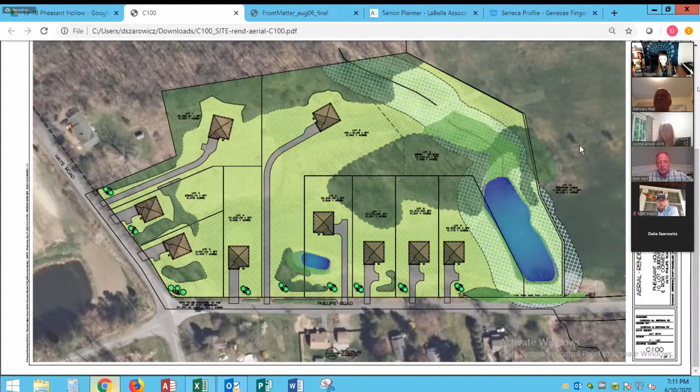So in essence, the map you have in front of you is the same map we've been working on for the last 7 or 8 months. We first introduced the project back about a year ago, in June of last year. We've had some slight revisions, but for the most part, the lot configuration and layout you see here is similar to what we've had all along. This is the Pheasant Hollow Golf Course parcel of land, 106 acres in size. The area shown in the more vibrant green shade, where all the lots are, is slightly over 10 acres in size. The 10 acres is a requirement of the residential cluster provision.

So in essence, the intent is to utilize existing road frontage on Hays Road and on Phillips Road. We've broken that land up into 9 acres, 9 lots, and the 10th lot is the remaining golf course parcel. The lots are all about a half acre in size up to about an acre. Lot number 1 is an acre in size, and lot number 5, actually the lot that I'm building on, is about 4 acres in total, but 2 acres of that is green space or open space area per the cluster provision. That would be the area, if you see the dashed line running about the midpoint through lot number 5, and all that shaded area and the irrigation pond on the right-hand side.

So the overall acreage of lot number 5 is about 4 acres in size, but 2 acres is open space for all the lot owners, the other 8 lot owners within the subdivision. This parcel of land has existing water line with plenty of volume and pressure. We did hydrant flow tests on that.

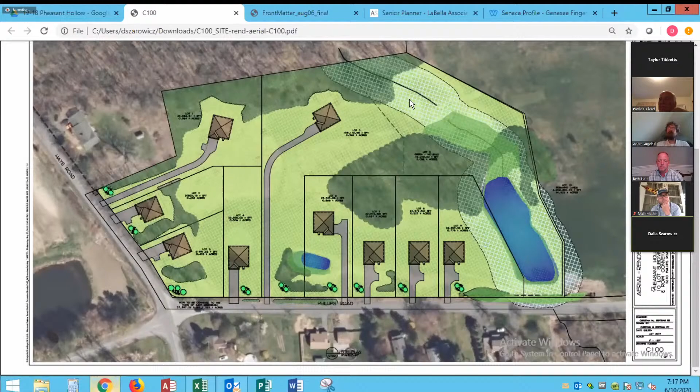Can you hear me all right? Yep, we got you. So now we're going to open up to the public. Adam, I don't know how we do that, or is Dahlia managing that? Yeah, so, we done with the screen sharing? Yeah, I think so. I think we'll open it up to public comment at this point. Okay.

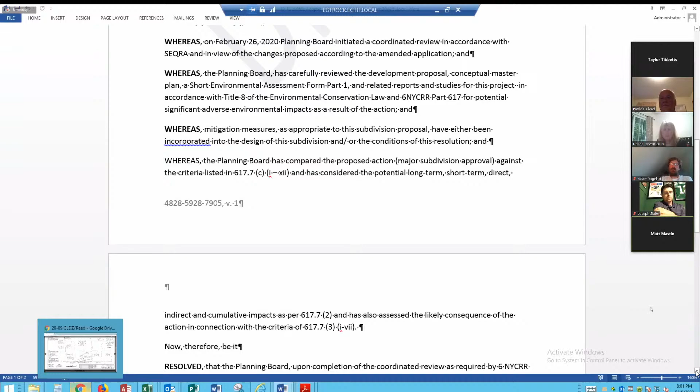and has considered its potential long-term, short-term, direct, indirect, and cumulative impacts as per 617.7(2), and has assessed the likely consequence of the action in connection with the criteria of 617.7(3). Now, therefore, be it resolved

that the planning board, upon completion of the coordinated review as required by 6 NYCRR Part 617, hereby declares itself lead agency under SEQR and reaffirms the classification of the action as an unlisted action in accordance with 6 NYCRR Part 617, and be it further resolved that based on the environmental assessment and review, the planning board has determined

that the project will not have any significant adverse impacts on the environment, and that a negative declaration pursuant to Part 3 of the SEAF is hereby adopted, and be it further resolved that the planning board authorizes the chair to endorse the SEQR determination and the supporting rationale contained therein.

Do I have a second? Second. Second by Mr. Viola. Okay, Ralph Viola. Roll call as follows: Chairman Mastin, yes. Mr. Viola, yes. Ms. Kupiak, Ms. Horn, yes. Mr. Panton, Mr. Panton, Don, you're on mute. Yes. There you go. Motion carried by 5-0 vote.

All right, so next we move on to 1927, the new Verizon store, proposed Verizon store at the Pizza Hut site. So I think we have Luke and we have Guy, right?

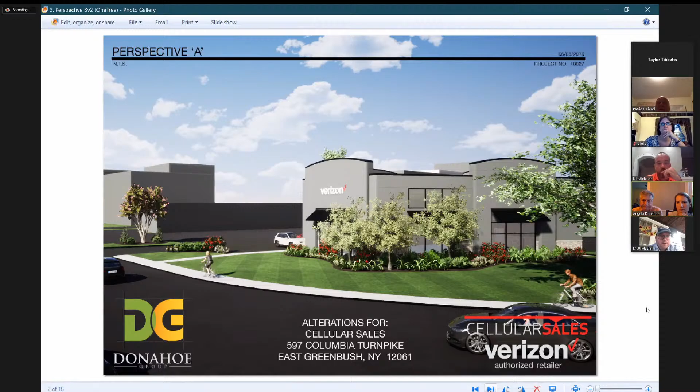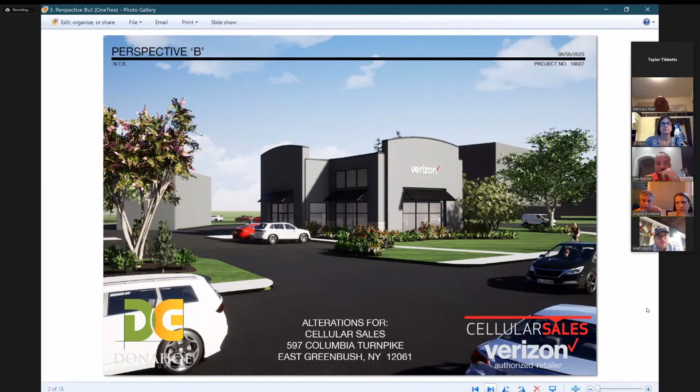So this would be a view. Bear with me, I had gotten my orientation wrong. So this is a view looking east, and again shows the one tree, and shows some planting, some green underneath of it. And you have the site plan document that our engineer had provided as well.

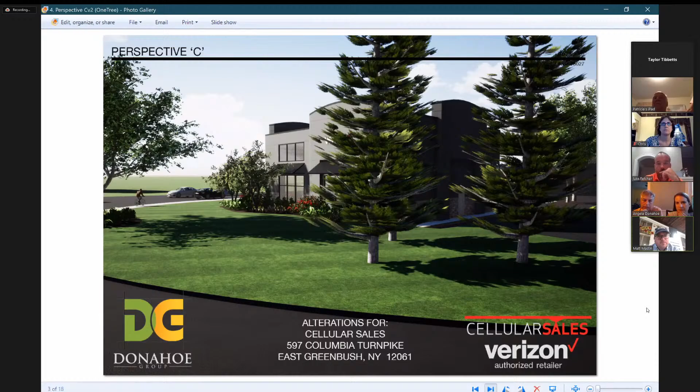Please let me know if you want to stop at any one of these. So you're still proposing the one tree, but you've added the undergrowth and uplighting that Nancy had recommended. Correct.

The other thing we wanted to provide an illustration for the board is that relative to the zoning, should the adjacent lots north on Troy Road or west on Columbia be developed, the zoning requires that any new building be 2 stories or no more than 50 feet in height, and that the building be built up to the property line.

So what I asked Angela to do was create a couple images for the board, so they could see that if the property to the north on Troy or west on Columbia was in fact developed, how that would impact the view. That's something we have no control over, and it is something zoning desires, to try to create that walkable street front.

It's really nice, I hope they go for it. Don, can you go on mute? I have to skip through all of them to get through that.

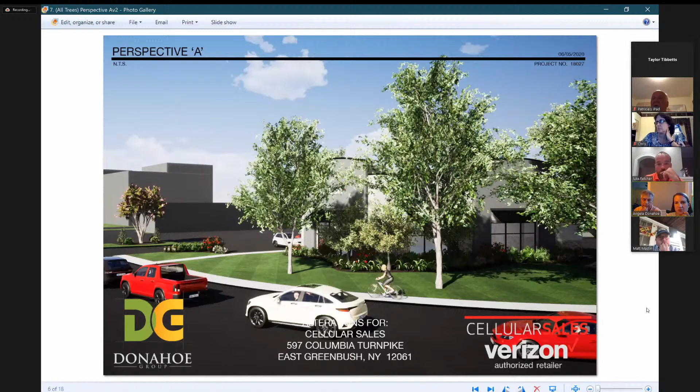Go ahead. Okay, so this is just showing with all the trees. I'm just going to skip through these. And then we'll come back. But I just want to show what Guy was referring to. He got ahead of himself.

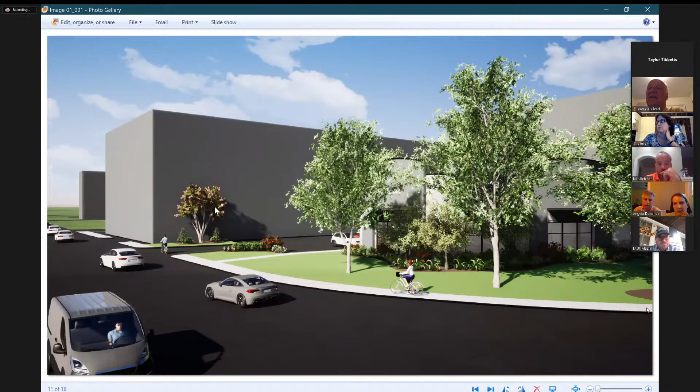So this is showing this building back here represents if a building was built up at the property line. It actually kind of varies a little bit on that side, but on the front, and you can kind of see the one in the back here in this image.

I'd also like to point out that, given we're taking advantage of this existing building, which allows us to set back from the property line, when these other properties are developed to the desired zoning code of being at 0 on the front, we would be the only property that can offer the greenscape we're providing at this point.

That's a fair point. I was wondering why the hell that building is so big.

Yeah, so those are represented at 50 feet, which is the maximum. The height isn't so much the issue, of course, as it is the fact of being up to the 0 property line.

So that is the view traveling south on Troy, because I know there's been a comment about the ability to have a good view of this building traveling south on Troy. But south on Troy, what we're really looking at is a side yard to the property, which doesn't allow us to put signage on, and should the sub shop really have fantastic growth, this is what they may do with their building.

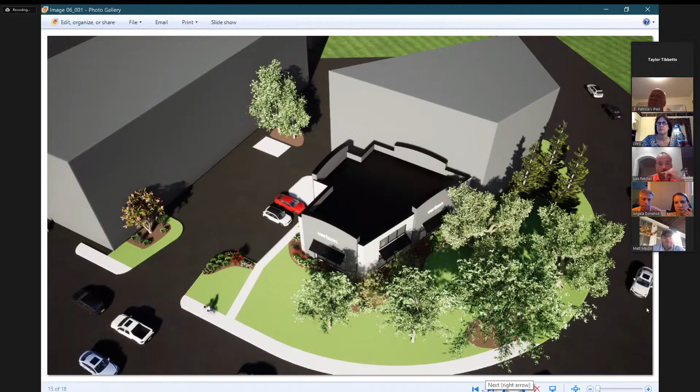We just wanted to kind of propose some still images first. Yeah, no, this was all helpful. I think seeing what the surrounding buildings would be is helpful. So let's get comment and then we can go from there.

So let's start with Ralph. What do you got? Well, the first comment is in regards to the sub shop and, let's say, the laundromat. They also have the same ability to build on the same footprint that you did, that would allow them to keep the building in the same location and also keep the heights down, same as you did. But...

Besides that, as members of the planning board, we're responsible for providing potential developers guidance during the planning process. We must ensure that they are adhering to local laws, zoning requirements, and restrictions. We also have an obligation to the residents of the town to ensure that the beauty and the rural character of our community is protected during the process.

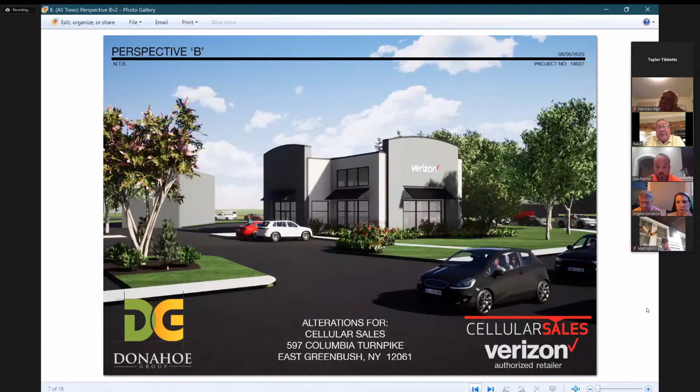This parcel is at the focal hub of our town. It is imperative that we protect whatever green space is left at this intersection. The residents of East Greenbush will be devastated if they were to drive by some morning to find these trees removed. As stated over and over again, these trees in question are not even on the developer's property.

As a member of the East Greenbush Comprehensive Planning Steering Committee, we have discussed this area in detail. Although we all want the development of this commercial area to flourish, we are very well aware of what the rural character of East Greenbush has to offer. We have recommended to the town board that this vision remains.

I believe that the Verizon store can be a viable business in our community, and its success doesn't hinge on whether the store has 360-degree visibility at all times. Given the reasons I've stated over the last month, I urge my fellow board members to realize the devastating visual impact we will have on a major focal hub in our town if we allow the trees to be removed. I cannot support this project as currently proposed, and I hope my fellow members will consider these points in making their decision.

Thank you. Thanks, Ralph. Nancy?

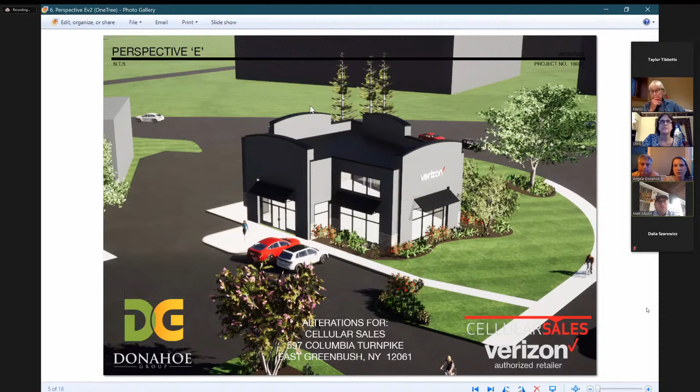See if I can, I'm just going to do start screen share, see if that does it. Can you guys see my screen? Not yet. Not yet.

Come on. There you go. Now we can. Yeah, okay, all right.

So this is the tree that I'm talking about, that I do think covers quite a bit of the side. Can you start your PowerPoint so it is expanded? Oh, sure.

You can go down on your right, next to the minus. There we go. On the slide view. Can you see it still?

Yes, so that's the tree that I'm talking about. If that were down, you could see this side of the building all the way to the back corner right here. You're looking at it at an angle, but as you're driving along, this is the tree that's in the way.

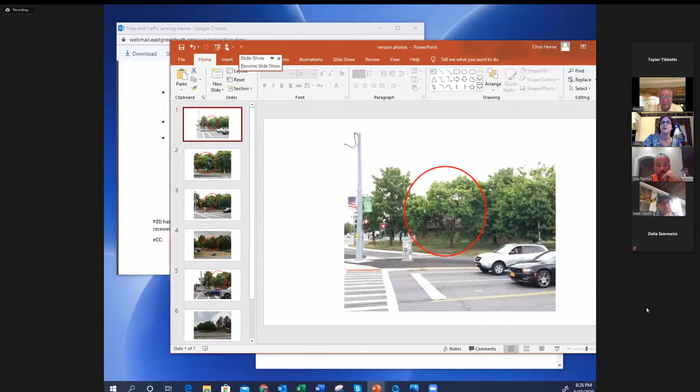And these low branches here, which are on this tree, could easily be trimmed away. And if you take this tree out, you've got full view of the entire side of this building.

Chris, did you take this picture? I did, yep. Where did you take this picture from? I was standing in the middle median, but at the very corner, like almost in the road.

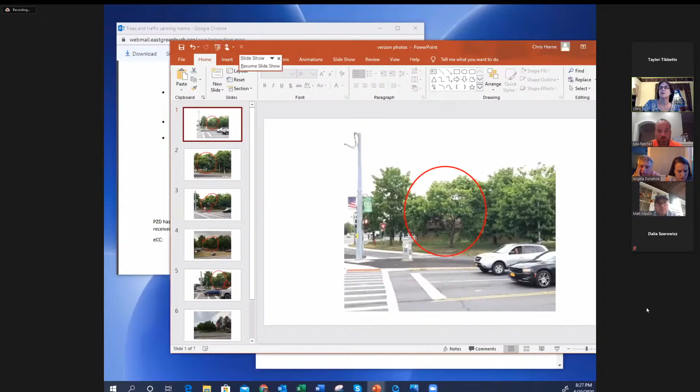Thank you. Let me see if I can... so that's... oops. Not able to advance the slides for some reason.

So I guess what I'm thinking is, is there some kind of happy medium we can get to here where we can put this to bed? Are you guys, meaning Guy and Luke, willing to keep 3 trees? I know it's going to pain you to do so, but not take them all out, and we can meet you somewhere in the middle.

And I'm actually a little curious, which is the tree that you're proposing to keep? Well, with your picture there, the tree that we're proposing to keep is the one most left in that view. It's the tree right on the point, probably a significant tree relative to the point.

And of course, you're demonstrating that removing this tree helps us with some visibility to the corner. Yeah.

Is my screen still showing the tree? No, it isn't. The PowerPoint went down. Sorry, I do have 2 screens here, so I'm going back.

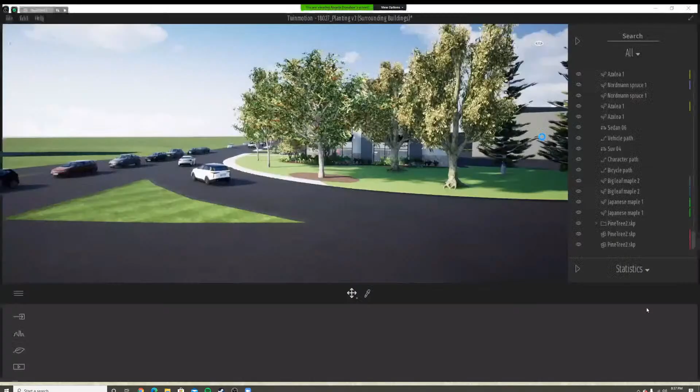Move all the trees in. So the one you're circling now is the one Chris thought should go, right there? Or is that the one you want to preserve? That's the one we thought should be the significant tree we thought should be preserved, yes.

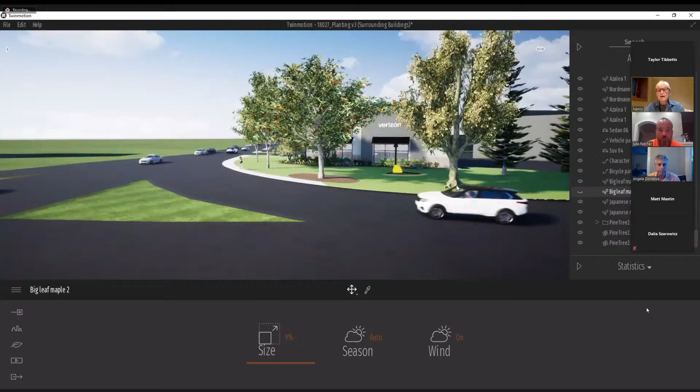And that one, what happens when that's gone? Yeah, there it goes. Who's looking at that? Somebody in the parking lot across the street? Yeah, that doesn't correlate with my picture though. No, and it doesn't help us at all. You just took out the tree that's closest to the building.

Right, and I think it's on their property is what I'm saying. No, none of them are. None of them? Oh no. Okay. But that's the same picture, what I was suggesting. Yeah.

But to Chris's point, I think I'm looking at a picture myself that I took today, and I don't see that. I see the big tree at the point. I'm sorry, Ralph, was that a question? Yeah, I'm just looking at the actual photo here, trying to compare what you have presented. Oh, what we have presented, I don't know that we got every limb for limb and leaf for leaf. No, I trust, yeah.

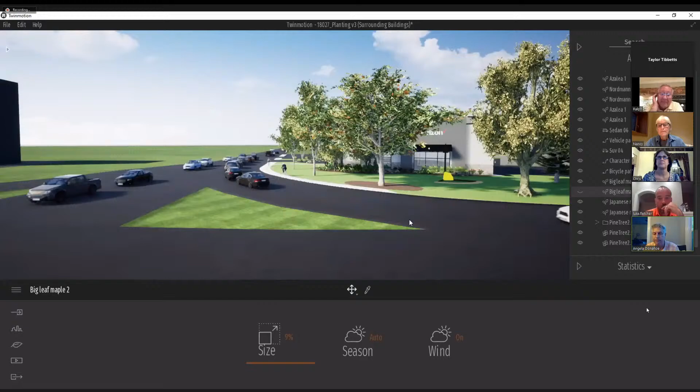But I assure you that every tree has been projected from its surveyed spot. So would you guys be amenable to keeping 3 trees? I don't see a scenario, we could put this up for a vote. I don't see a scenario where we're gonna agree on this.

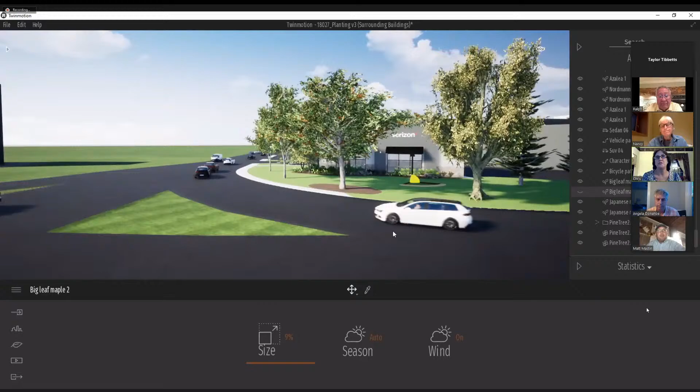Could you take out -- I'm just confused because this is the tree that's got the brown ground where the bicyclist just rode by. That's the one that in my pictures I think is the obstructing tree that needs to go. And that's the one it looks like you're proposing to keep, which doesn't make sense.

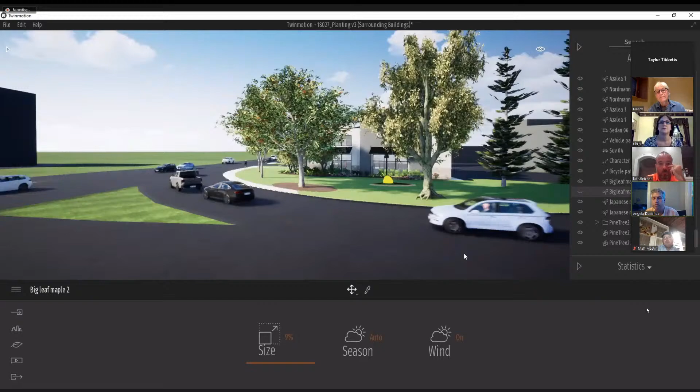I think, Chris, I would agree with you from a static position that tree probably would allow us the most benefit if we removed it. However, given that viewing this building is really a dynamic experience by either traveling east-west on Columbia or north-south on Troy, believe it or not, that is not the tree that provides us the greatest grief. Matter of fact, that tree's further from our building, so as you make the dynamic move around the intersection, it does provide for better visibility to our building.

Can you put the other tree back and take that tree for a moment? Are you able to do that? Yeah. That's amazing how you can do that. Great technology. Yeah, we can denude a whole property in just seconds.

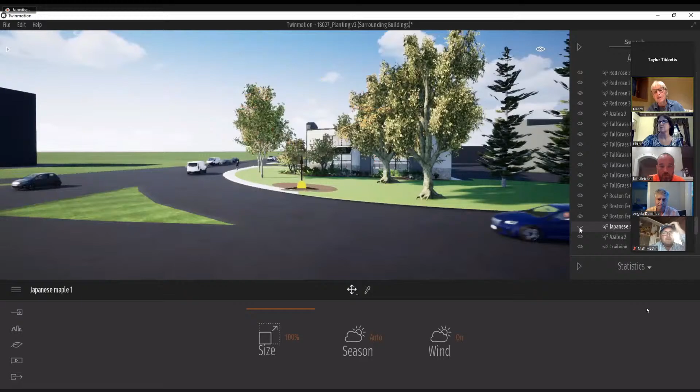Chris, what I like about leaving that one in is what Jim was trying to bring up, and I was talking about a little bit with the traffic calming. I think being close to the sidewalk does add some traffic calming, but that's my opinion.

But there's a tree that's farther out on the point that I think has the most value for the traffic calming. Which would be the one right now that's to the left of that? Which is the one to the left of what was just taken out, which I think is actually a little farther up the curve.

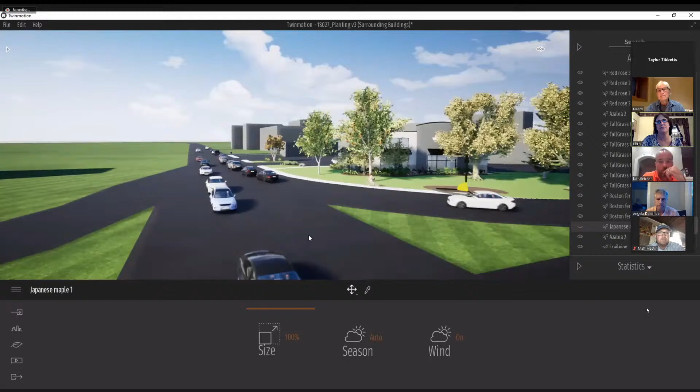Well, the last one there is really in tough shape. That little one, with the bicycle right there. That's in pretty bad shape.

Now, can I ask you a question? Of course. Don't we have a pylon sign going out in that area beyond where the tree is? We do, Ralph. It's a little further. It's a little closer. Right. It's in this other cluster. Correct, right, correct. Yeah, right, you do have a pylon sign that's going to be of some height and it does give you some additional recognition.

Correct, it does. Thank you. And again, that tree would be a problem for that. B, I think that tree is struggling, perhaps because of its adjacency to the parking area. And C, part of our landscape plan -- it doesn't look like it in that image, but our landscape plan really starts to come out towards that, and I think part of the health of the plantings we're proposing, the weeping crab apples on the corner of the building, they too depend on being fed from sunlight. Right, the sun, that's going to be important to the new plantings.

Can we do this? Can we take that tree out that you got highlighted now, put that tree back that's closer to the curb, and take the one out that you originally wanted in the back, that Chris didn't think was...

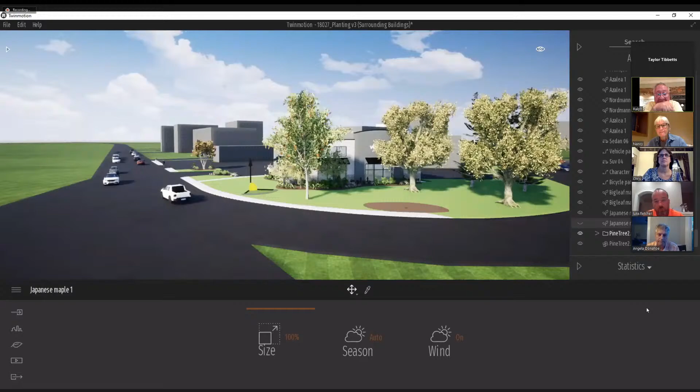Yeah, and which one? You wanted to take that one out, right? Isn't that the one you proposed, Guy? Yeah, definitely, that's the one in the back, correct? Yeah, right, that's the one right there in the back that you proposed. I mean, honestly, looking at that with those right there, I would not have an issue.

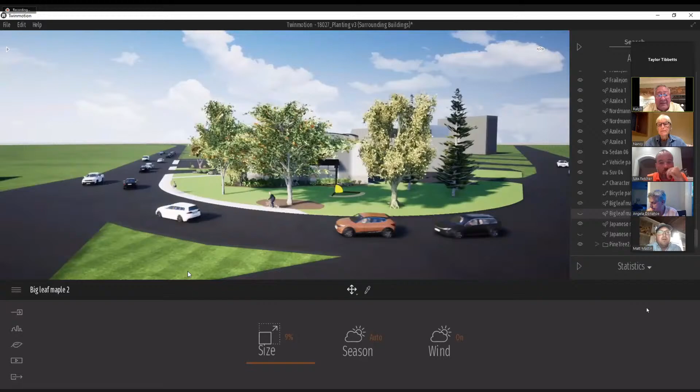I agree, I like those, Josh. If you took the one in the front down that's on 9 and 20, that little straggler that's going to block your pylon sign, and take out this one that you just did, it's going to give you some visibility of your signage back there. Personally, my own opinion is I'd put one sign facing 9 and 20, and one facing Route 4, but that's up to you. If you did that, if you took those two trees out, that would be acceptable to me.

So what we're left in, Angela, what we're left in this image is 3 trees. Are you guys amenable to that? No, I think there's 2 that are on the front.

Could I put one more picture up, because I'm confused about the straggler? Well, there's one of the, I believe 6 trees. There's one that is indeed removed and we haven't put back, that is growing right on the corner of the building, that is in that landscape.

Yeah, okay, so I would be fine, like Ralph said, with what this looks like here. How do others feel?

Well, first of all, the applicant, Luke, are you amenable? One more time, so actually there's 3 trees that would be removed, correct? Right, that is correct. The one that's in the yard is sort of set, and then the 2 smaller ones that are struggling, one next to the building and one closer to the sidewalk next to the parking area. Can I show my screen one more time?

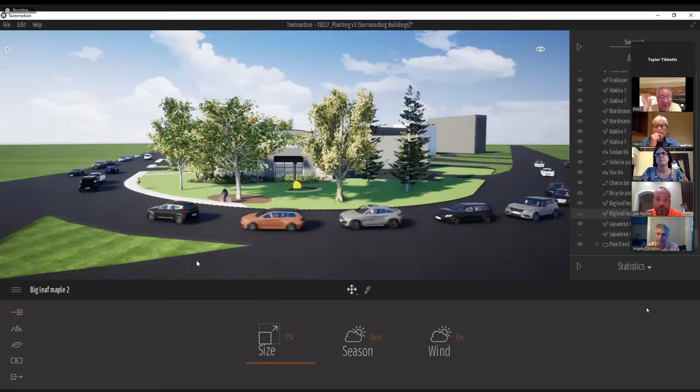Yes, Chris, please do. Ralph, go ahead, you were going to talk? It shows the barrel-shaped parapet that you like. I like that. So Dahlia, if you could help Chris share screen. Luke, if you could talk, that would be great. The answer is yes, very simple.

So you'd be amenable to keeping those 3 trees being acceptable? That will be fine, and I think that's meeting in the middle on it. So we're talking about keeping this one. Can you guys see my screen now? Yes, ma'am. This one, getting rid of the back one, but this one here, if this was what you're calling a straggler, I think it was a beautiful tree.

No, I think it's going up against the building. And by the parking lot, you're talking about removing? There were 2 there that were against the building, scraggly, I thought, yes, 2 of them. So there's one against the building.

I wouldn't want to let this one go, I think this is a beautiful tree. Chris, the impact of that is it completely blocks the pylon sign, so that's the impact. I think Ralph kind of mentioned that earlier, the pylon sign is the issue with that one, so that's the comment on that.

But are we gonna get, maybe you can put one of those weeping trees or something kind of in its place? I don't know, I don't remember how your rendering showed it.

Well, originally, if I could chime in quick, again, like I've been trying to say, I would like to get to a compromise. I'm good with those 3 trees, like Ralph said, and leaving it like that. We've already spent 2.5 hours in the past 2 meetings talking about this. I mean, I'm good with that layout of the 3 trees. I would be interested to hear what the rest of the board has to say.

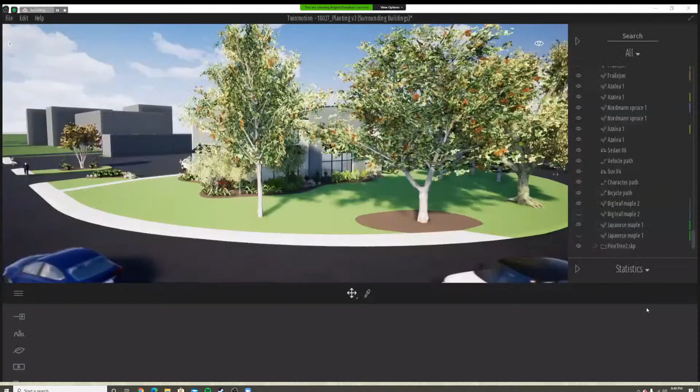Okay, because if we're going to vote on this I just want to make sure as a condition that we appropriately label them. All right, so this view does not have the pylon sign in it, but you see where the part where the sidewalk is that we've added to come out to the other sidewalk, again to create that pedestrian environment, right?

And so the pylon sign is alongside of that sidewalk, and it sets back on our property, which pushes it back into that other tree, limiting its visibility. So to answer your question, Ralph, you can see the tree that's further west. That tree, that's our tree, we're planting that - it's an ornamental tree. And then again, on the corner of the building, there are 3 ornamental trees on the corner of the building.

Okay. Yep. Again, I'm good with that view there. That's the view we looked at before, right? Correct. Yeah, but we're doing away with this one tree though, right?

Where that bust is, right? No, all those trees that we're showing there are the 3 trees that we're talking about saving. Gonna save, okay, these are the 3, yes. Can someone look at a site plan and tell me, are people good with that generally?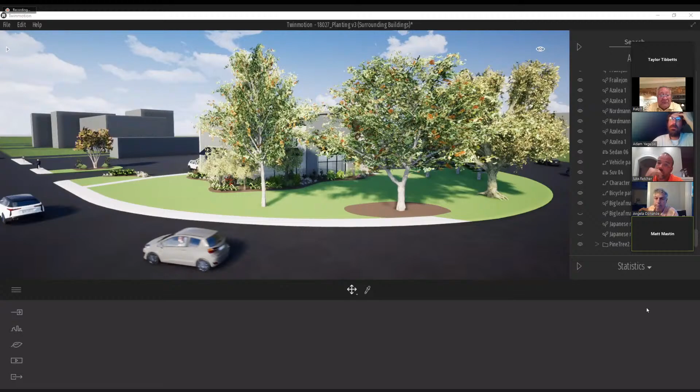We got to get back in town hall. I know.

So it's those 2 and then 1 in the back, I guess. Well, this is the existing plan. Yes, it's that. So are those labeled somehow? Well, the existing trees? Yeah.

So I want to do a condition that outlines the 3 existing trees we're talking about. Well, I would suggest perhaps we could do it by orientation. So what we're talking about doing, if we're in agreement, is keeping the 3 most southern trees. Right. And the pines.

Unless Nancy wants the pines. Well, I think those could be uplit too in the middle, because they look nice, because they're so spiny, but...

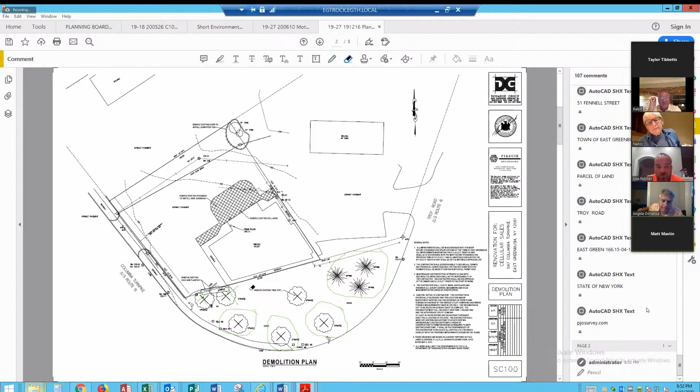So, is everyone clear on the 3 most southern trees? Plus the pines, yes. Well, the pines are staying, right? Yes, correct. We would keep 6 out of 9 - the pine and the 3 most southern maples. All right, Adam, if you want to show the proposed site plan, I may need some help reading the descriptions of the vegetation that's proposed.

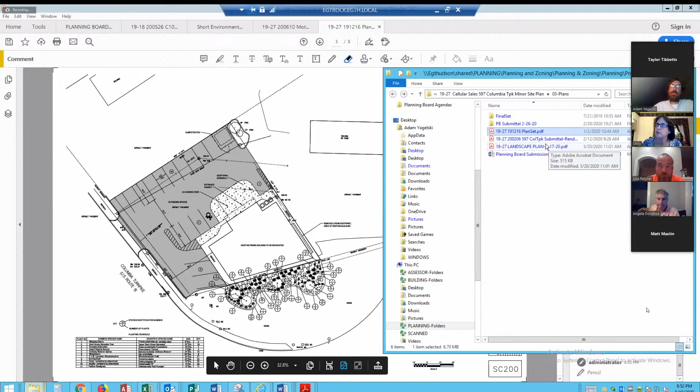Let me just take a screenshot. No, I don't need the proposed stuff. I just wanted, as a resolution, to be able to call out the existing trees that are going to stay. Guy, would you be able to put some other landscaping in and around the sign? Because then you're left with just barren lawn where you're taking the other 2 trees down.

Well, this view does show - this helps Chris show us the location of the pylon sign. Thank you, Adam. Despite the fact that it's not labeled, you can see that it is up near the sidewalk and adjacent to landscape beds on the corner of the entrance in the parking lot and on the corner of the building. So I think it's pretty landscaped into that area.

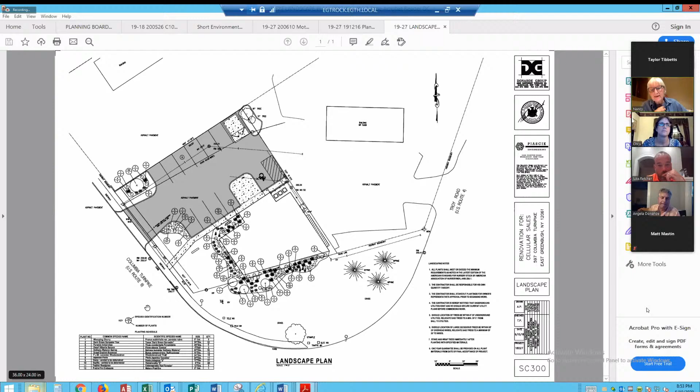Chris, in losing that 1 tree, the way I see it is that the new vegetation, those weeping cherries and stuff, they're going to need more sunlight. So if we continue to put trees there, it's going to start to block out the sun and that garden's not going to thrive. We need to get some sunlight on the new plantings, in my opinion.

So I'm going to make a motion to approve this with the condition that the 3 pine trees stay, and that the 3 southernmost maples stay. Is anyone opposed to us voting on this now? I think we should vote. Yeah, all right.

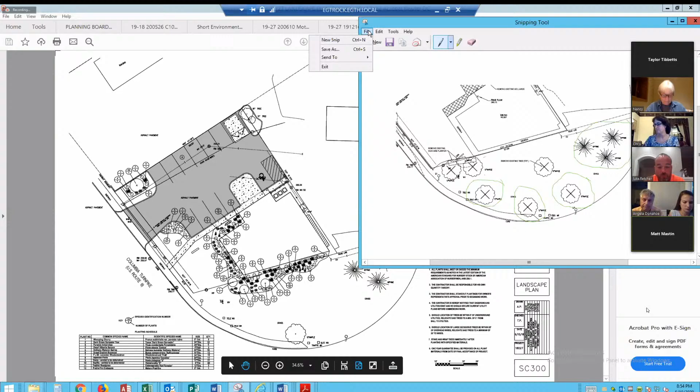So I'm going to make a motion that the Town of East Greenbush Planning Board hereby classifies this action as a Type 2 action under 6 NYCRR 617.5(C)(2) and approves the minor site plan prepared by Donahoe Group dated September 10, 2018, last revised March 17, 2020, subject to the following conditions.

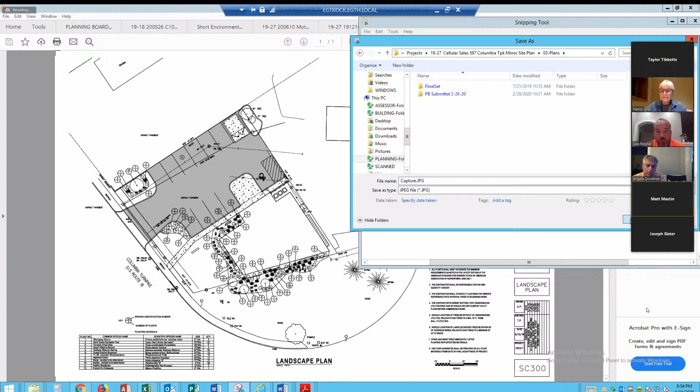Is that the right date? Is that the last time the site plan was revised? Oh yeah, what's the last revision on your drawing? Guy, do you have what's your last updated? Yeah, no, this is correct - March 17th? The site plan that we're reviewing here is indeed the correct site plan. No, what's the last date of your revision? Was it March 17th? Yeah, I can't quite - because that's the last plan that he provided to us.

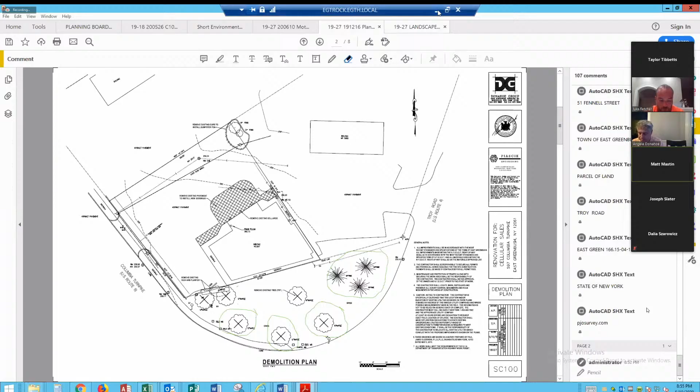Subject to the following conditions: satisfying outstanding technical details as determined by the Town Planning and Zoning Department; payment of all applicable fees, including any fees required in connection with the town's Western East Greenbush generic environmental impact statement and/or Local Law 5 of 2018.

Prior to issuance of a certificate of occupancy, a sub-slab depressurization system must be installed subject to review by the Planning and Zoning Department and approval of the Building and Codes Department. Prior to issuance of a certificate of occupancy, it must be demonstrated, subject to Planning and Zoning Department review and Building and Codes Department approval, that the SSD system was installed and tested successfully in accordance with NYS DEC and NYS DOH guidelines. The SSD system, as installed, is to be certified to the town by a responsible third party, such as a licensed professional engineer.

A test for soil vapor intrusion was conducted in conformance with NYS DEC and NYS DOH guidelines and shows that there is no SVI on the subject property. The applicant should, within a reasonable time frame, convey the results of the SVI test to other authorities having jurisdiction and/or interest, such as NYSDEC and NYSDOH, for their information and to support ongoing remediation activities relating to the adjacent Superfund site, and that the 3 pine trees remain in the site plan and the 3 southernmost maple trees remain.

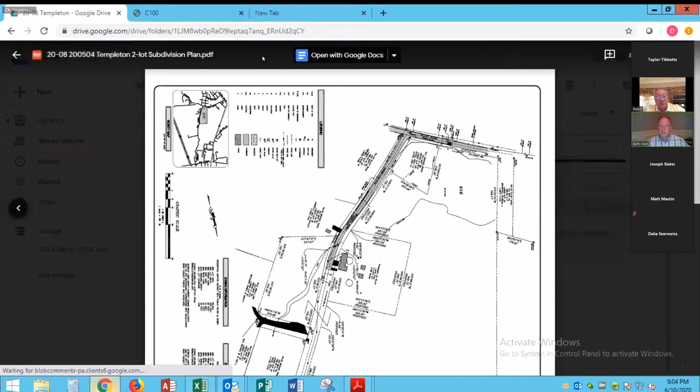So in essence, the Templetons own, I think it's a 45-acre parcel on Michael Road. A year or so ago, they subdivided a parcel where their daughter just recently built a large house on the corner.

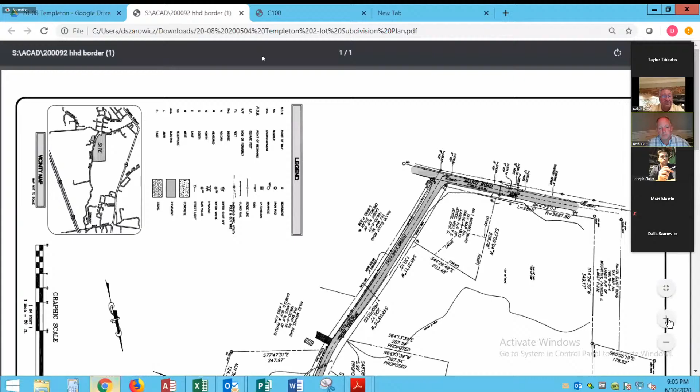Hugh and Margaret are looking to subdivide out about 2.5 acres of land at about the midpoint of the parcel. What they're trying to do, for finance reasons, is get their house broken off the large piece of land so they can get a mortgage on their house without tying up the land as well.

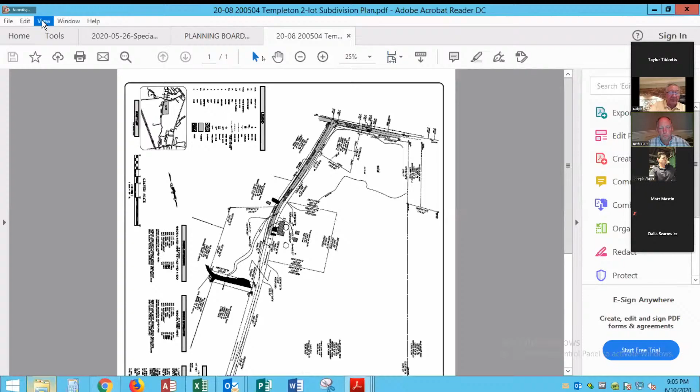So the Templeton parcel is on the right hand, right now it's on the top side of the map. The gray shades you see are Elliott Road running up and down the page, and left to right is Michael Road. So the left intersection is Michael Road as you head across the page to the right, heading, let's say, to the YMCA.

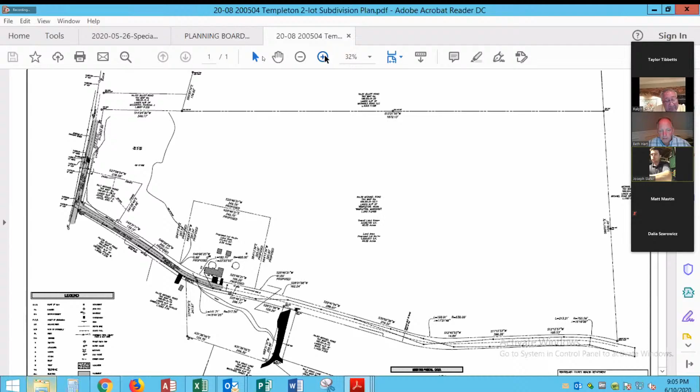So the Templetons own, that large 45-acre parcel of land—yes, 46.65 acres—they're looking to break out this piece of land here in this rectangle. This is their house, a few outbuildings, their well and their septic field situated on this parcel. So basically they're looking for a 2-lot subdivision: lot 2 being this smaller piece, 2.56 acres, and the balance of land being lot number 1, 44.1 acres.

There are a few items I do need to add to this map. Adam, Dalia and I have had some conversations, so we need to add a little bit of site data—the rainwater or stormwater district, which is a 50-foot center line on each side of this stream, a buffer area. I think there's a 30% area to add as well. So there are some things I need to add that I'll work with Hirschberg, the surveyor of record on this project, to update the map so we can submit it next time for public hearing.

So this is another, somewhat straightforward, I think, 2-lot subdivision. Ralph, do you have anything? Well, my only question is, Steve, did they subdivide once before for that house that was just built?

That's correct. This house is in the corner. Their daughter recently built a home there. Yeah, I really can't see it, right? I can't see where the... It'd be at the intersection of Elliott Road and Michael Road. Yeah, okay. Looking at this, you must have to drag it over, but my view, I can't see it, but okay, I'm fine with it. Yeah, you know where the house is, right, Ralph? You drive by it, right? Yeah. It's just not showing up on my screen right now.

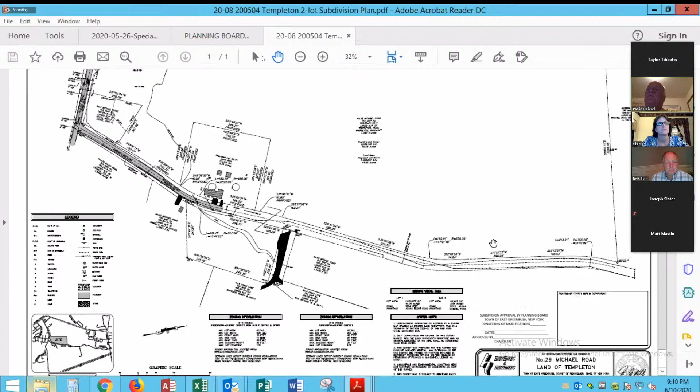Are you good, Don? Yeah, I'm good. And can you pull that? If I may jump in, just want to make one point here.

Go ahead. Thanks, Matt. For the board, you'll see in our comments one of the key things this is missing is some sense that this land is actually buildable. We have no plan for septic, driveway, water supply. We have no idea if it meets the MS4 requirements. We can't leave that to the building inspector. We need to know it's buildable and how, and that it meets MS4 requirements before, in my opinion, you guys approve it.

I think that's reflected in my comments, and Steve has those as well. And the intent's not to approve it tonight anyway, right? Yeah, right. Yep, that's noted. So you're suggesting the remaining large parcel, Adam, needs to be shown as buildable?

We need to know that, say, as soon as this plat is filed and they sell this and somebody wants the 40-some acres, we need to know that it's actually buildable somewhere.

Well, regardless of the subdivision, one of the things, Nancy, is the stream here. It's not clear where a driveway would come out, and if you have a long driveway and a house lot, you can pretty quickly go over an acre, which requires a basic SWPPP. So we've got to know more information, even if it's not immediately planned.

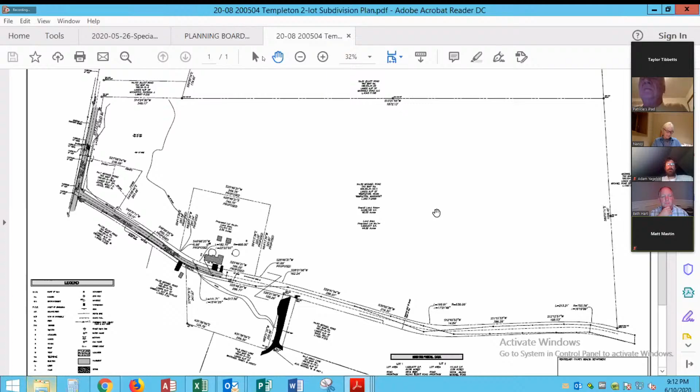Steve, just to confirm, you'd be ready for a hearing on the 8th of July? That'll give me time, Adam, to address yours and Dalia's comments and work with her on updating the map. One thing to note is the coordinated review is a 30-day process. If we hear back from all the agencies before then, great, but I wouldn't expect to, so that may push us out to the 22nd for the ability to close SEQR and do the approval. I want the board to be aware that if we do it on the 8th, we may not be ready until the 22nd procedurally.

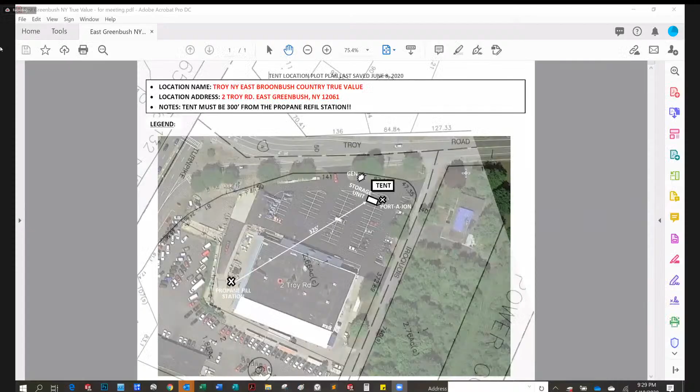You can go ahead and share your screen now. Let's see here, oh there it is, I got it. All right, let's see if I can share my screen here. Okay, so can you guys see it? It might seem a little busy.

I took what I could find from your plot maps online to try and get an idea of where the property lines are exactly. So the best I could do was line this center line up with the center line of Troy Road and Iroquois here as well.

Are you blocking? Is that tent blocking the egress? Keith, do you want to address the tent placement? Yeah, originally it was up inside that dirt grass area, but you wanted it set back, so we moved it back to that site. We could move the tent back into the double row parking where the storage unit is. We're just trying not to, we want to be as far away from the parking area and the store as possible.

I would be concerned because the entrance is a one-way in, and technically you only have 2 points of egress, and it appears you're blocking one of them. It would just mean people would have to go around that aisle row of parking right there. We'd have to section off the tent on both sides. Technically we're not blocking the two ways of exit, although it is in that front drive lane, but you can get out that way. We can certainly pull the tent this direction, which gets it away from the property line even further, if that's exactly where it is.

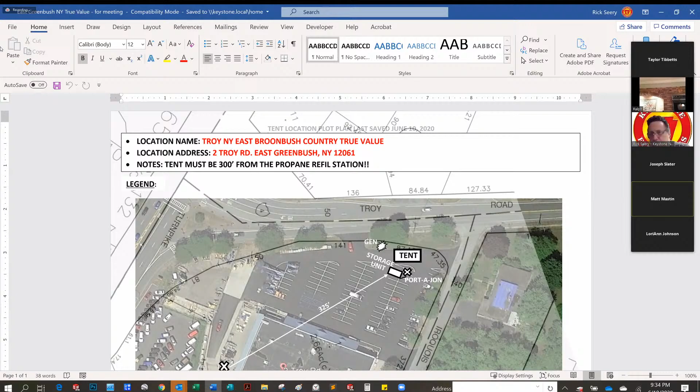So we would do some kind of a condition relative to modifying the tent. Obviously you guys are in a time crunch at this point, but I could bring the map up and change it right now. If you have a couple minutes, let me see if I can change the screen so we can all agree on what we're talking about. It might cut down on the cycle time. That'd be okay with you.

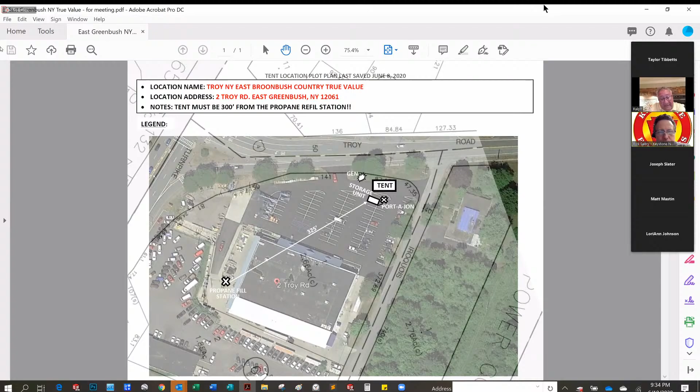Let me see if I can change the screen share here. While this is going on, let me suggest also.

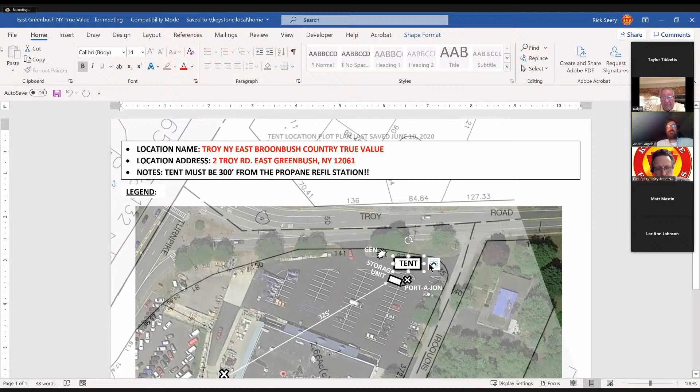For anything that's even remotely close to that property line, we need a survey, and Kevin is going to need this laid out for him to make sure it's compliant with what this board approves. This overlay is plus or minus a whole lot, it seems to me. So along with that, if we move the tent and we're further away from the property lines, can we avoid the need for a survey?

Good. You must be thirsty.

One comment, and I don't know if it's feasible, but I believe you're talking about the other location with Planet Fitness, is that correct? What other location? Didn't you come before us last year with Planet Fitness? That was not us. Oh okay, I'm sorry.

It was I believe the fish place that's over there. That's what we had a few years back. Marty, that's worse than this. Well, your Porta John's in the middle of the road - you might want to move that. Yeah, I know, I'm getting there.

That tent will then be modified, Rick, I'm sure, to probably a 30-30 to make it take up less spots. Okay, so that would be fine. Yeah, we could - I like this much better.

What's the requirement from the propane fill? 300 feet. 300? Okay. Yeah, and I'll go back and double check that to make sure - I think we're good. That 325 is probably actually a little more than that, but I can go back and double check it to make sure we get in there. The state will make sure, so we want to make sure before we even bother to have them come out.

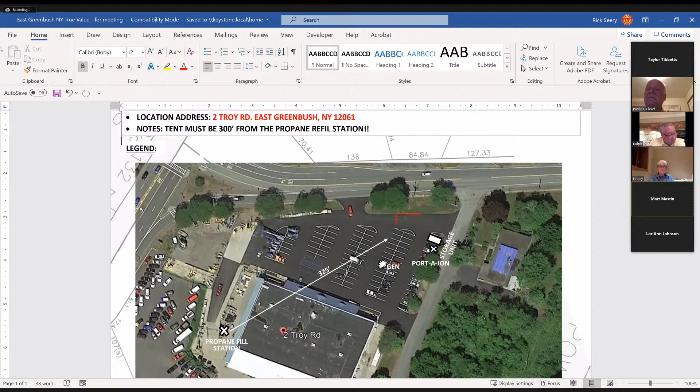All right, so with that, I'll make a motion that the Town of East Greenbush Planning Board classifies this project as a Type 2 action under SEQRA 6 CRRNY 617.5 C21, minor temporary uses of land having negligible or no permanent impact on the environment, and hereby grants final approval of the proposed temporary minor site plan modification subject to the following.

Tent setup will not occur before June 18, 2020 and shall be removed no later than July 6, 2020. All external signs and advertising shall not be displayed prior to June 20th, 2020 and shall be removed no later than July 5th, 2020. The business must be run in full compliance with New York State and county laws.

The above mentioned modification will be limited to a one-time use for a period of June 20th, 2020 to July 5th, 2020. The applicant must consult with the building department and complete all applicable permits, including but not limited to signage. All signage must be connected to the tent. Absolutely no signage shall be placed along Columbia Turnpike or Route 4.

Hours of operation limited to 9 a.m. to 9 p.m. Adequate lighting shall be provided on site. Shipment of products not to arrive prior to June 18, 2020.

Prior to issuance of a building permit, the applicant provides, subject to approval by the building inspector, evidence that the proposed activity complies with Executive Order 202 issued by Governor Cuomo, and related guidance from federal, state, and local authorities relating to COVID-19.

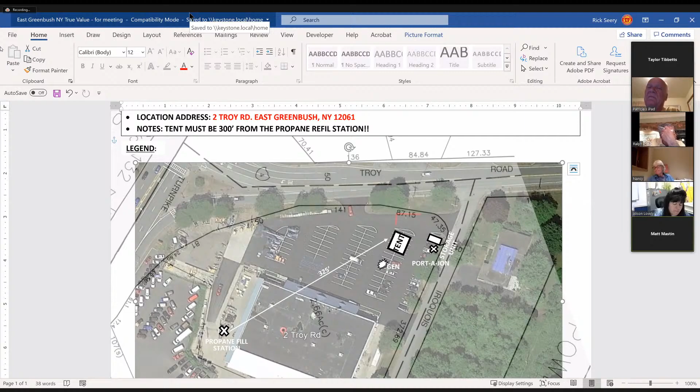Next, we have CLDZ LLC, 63 Upper Mannix Road for a lot line adjustment. Do we have someone on the phone? Is this on? Yeah, this is Brett Steenberg. Welcome back, CLDZ.

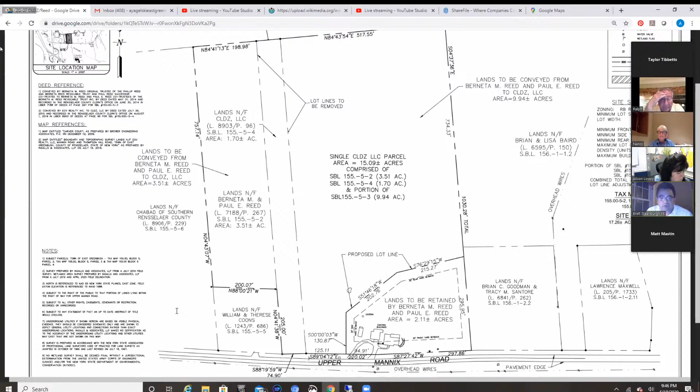The reason it's attractive to the owners is it allows the access road for Carver Court to come in at a much better location on Upper Mannix Road. When we started looking at it, there's a high point just to the west, right there in front of the Coons parcel, which really limited sight distance visibility. This allows us to move the access road a little further east and get better sight distance.

It also allows us to reduce the amount of wetland impacts. That area in the right of way, especially right out by Upper Mannix Road, has a substantial amount of wetlands, but they pretty much end right at the right of way that was formerly the line with CLDZ, so it allows us to minimize some of those wetland impacts.

So it was attractive to the owners and CLDZ to move forward with this, as well as the Reeds were looking forward to selling a portion of their parcel. So I think this is pretty straightforward. Ralph, do you have any questions?

No, I'm fine with it.

Nancy? I don't know what CLDZ is. What do they do? You said I'm sure you know. I don't know.

CLDZ is actually the corporation that owns it. I don't know if you remember going back to Carver Court, the cluster subdivision that we had before you a while ago, and we've since withdrawn the application, but we'll be right back in looking at it. They're the entity that owns that. It actually stands for Carver Laraway Donald Z Properties, because they own it jointly.

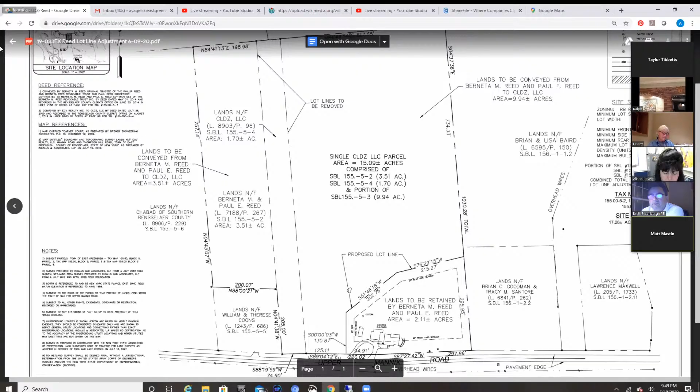So with that, I'm going to make a motion that the Town of East Greenbush Planning Board hereby declares the action as a Type 2 SEQRA action in accordance with 6 CRR-NY 617.516, and grants final approval of the proposed lot line adjustment prepared by Ingalls and Associates LLP and dated...

What's the date of your latest revision? It was June... give me one second while I zoom in on my plan on my computer. June 9th. Okay, dated June 9th, 2020, subject to the following: satisfying outstanding technical details as determined by the Town Planning and Zoning Board, and all remaining fees are paid to the town.

Do I have a second? I'll second. Second by Mr. Panton.

Roll call: Chairman Martin, yes. Mr. Viola, yes. Ms. Kupiak, yes. Mr. Panton, yes. Motion carried by a 4-0 vote.

Brad, thanks for staying with us. I appreciate it, no problem. Thank you for everything, good seeing you guys tonight. Take care.

Then we have a new ZBA referral. Allison, that's to give out, right? Yes, correct. Any takers?

It's the one on Route 4, 44 Troy Road. Everybody should have gotten it by email.

We can always give it to someone who's not here. Yes, we could, doing that tonight there, buddy. You're assigning it to somebody who's not here tonight. Let me text Jim Moore and see if he wants it. He just did one. Oh, tough shit. Oh jeez, I forgot about that. If Chris doesn't want to do it, I will, but I don't think she's ever done one.